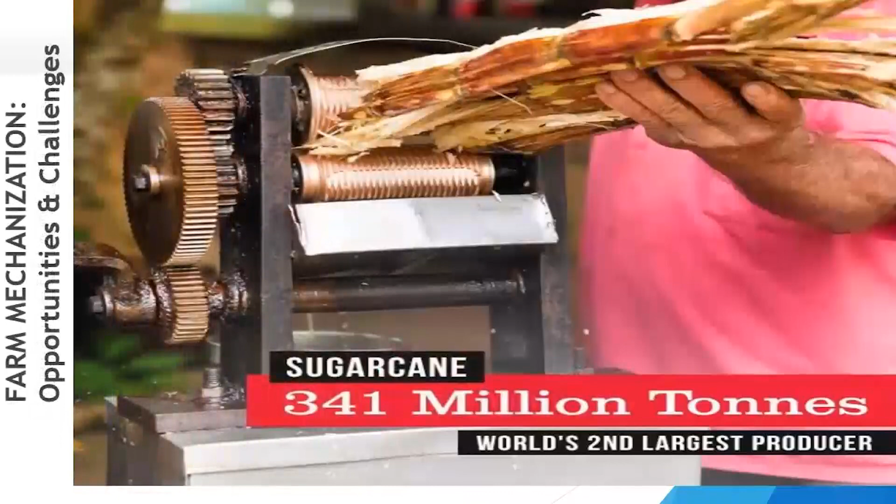Which is possible here is only farm mechanization. You can see sugarcane second largest, flowers again second largest in horticulture crops, and banana again the largest producer.

So the need for agriculture mechanization is a very important factor, and it also plays a vital role in optimizing the use of land, water, energy resources, manpower, and other inputs like seed, fertilizers, and pesticides.

We all know agriculture mechanization as well as farm mechanization. Agriculture mechanization is nothing but mechanization from seed to seed. It's a combination of plowing, seeding, application of fertilizers, harvesting, threshing, value-added products, and packing - that's the end. So that is seed to seed, complete mechanization, said to be agriculture mechanization.

Mechanization is very compulsory nowadays and in the coming future also. It also helps in the productivity of available cultivable area and makes agriculture a more profitable and attractive profession for rural youth. Nowadays many software people or high profession people are coming down to agriculture to do it with more mechanized methods, with greenhouses, polyhouses, etc., to get more profit.

It will also be useful for rural youths by having small CHCs - they can have mechanic shops, repair shops for making repairs of machinery, because the population of machinery is being increased day by day because of mechanization.

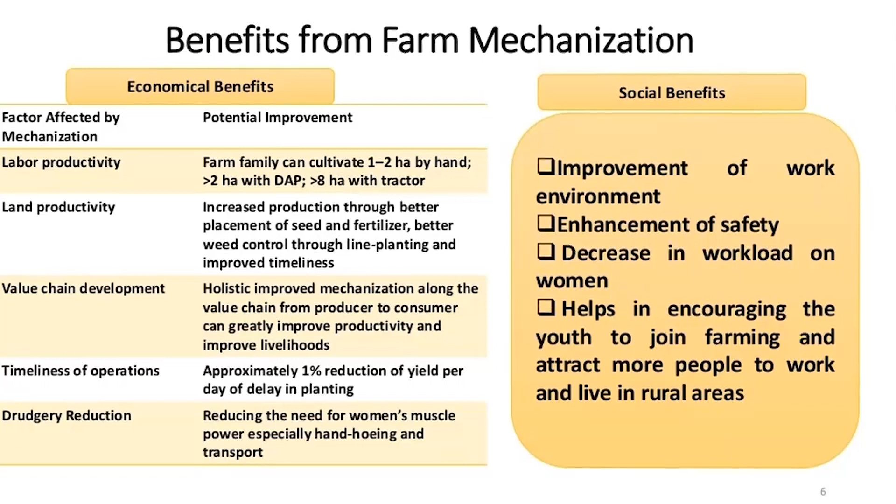If there are benefits, there will also be disadvantages of farm mechanization. That's why in India, we are still not 70 or 80% mechanized. We are always lagging behind at 30 to 40 or 40 to 50% mechanization. So there are some disadvantages of farm mechanization here.

One is that India is a very populated country, and the fragmentation of land is also a major disadvantage for farm mechanization, where huge machinery cannot be adopted in such small cultivable areas. Also other factors like different soil conditions and different environmental conditions matter.

Apart from that, on the machinery side, the cost of the machine is also very high, because raw materials are being imported, which escalates the cost highly. High depreciation and maintenance costs, and spare parts costs are too high. So maintenance and depreciation are also a disadvantage of farm mechanization.

The third issue is inadequate technical knowledge. A major issue in India is insufficient knowledge about machinery. Everybody thinks farm machinery just means a tractor, but it's not like that. Farm machinery is a combination of everything, from small tools to large machinery as well as smaller machineries. There are very few skilled people with the knowledge to operate these types of machinery, whether imported machinery or tractors.

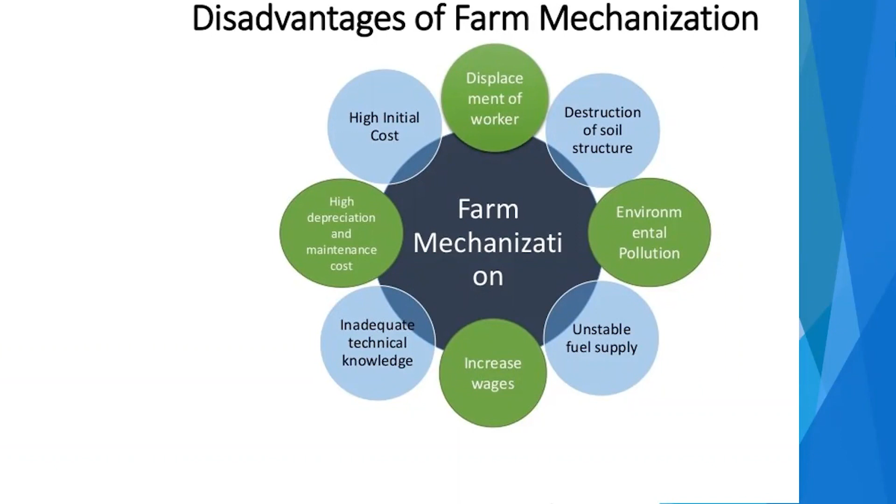So you can see the current status of farm mechanization in India. As we all know, the agriculture allied sector contributes approximately 14% to India's GDP. In future this may get increased. The use of proper equipment can increase farm productivity by 30%.

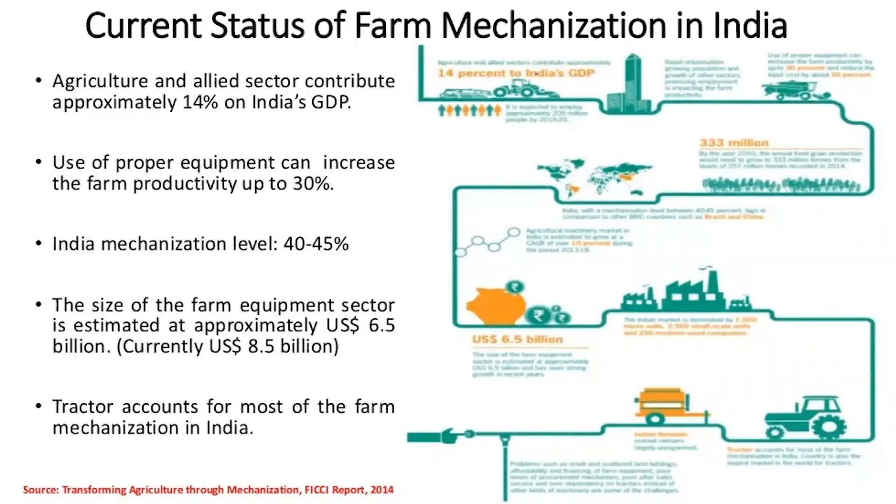So these are the extent of mechanization at various levels of farming, and these can also get increased. At present we can see soil work and seedbed preparation at 40%. This also can be achieved further in the future.

100% can be achieved. Nowadays this data is around 2014 data. At present we have achieved soil work and seed bed preparation mechanization of 60%. It has happened when there is a bigger area, it can be easily achieved. When it is a smaller area, then it has difficulty, so we have to go with smaller equipment to do these types of operations.

Irrigation also we are achieving around 37%, and latest we go for 43% being practiced now. Plant protection is also being increased, now 34%, nowadays it goes up to 40 or 45% being increased.

For seed and planting, earlier days people used to go broadcasting, using different types of seed drills. Nowadays people don't want to waste the seeds, so they went for precision seed drills and precision pneumatic seed drills, in order to place the seeds in exact spacing and get the yield with reduced seed sowing.

Finally, harvesting and threshing operations for most major crops, the major machinery has also arrived and is commercially available, around 60 to 70%. The same ratio is also existing now, being available at present.

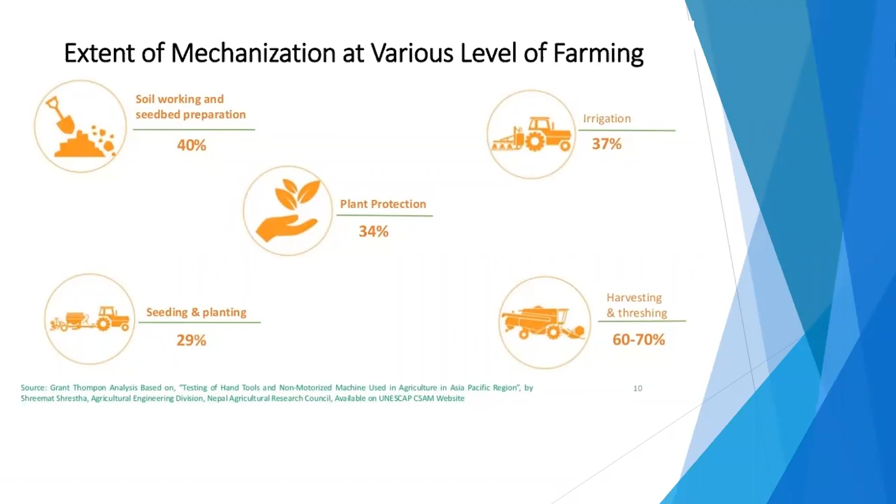So these are the major farm machineries used in India. We can see tractor is one of the major farm machinery, with 6 lakh units in the market. That is the biggest sale in market, worth 34,200 crores, because many tractor companies have been manufacturing in India to sell tractors, but it is not sufficient for India.

There are around 10,000 hectares per one tractor using it, that is from survey and statistical reports. So we still need improvement, to go with almost 1 crore tractors to have complete mechanization.

Power tiller's market size is very small compared to tractors, but now it has increased more. Nowadays the power tiller and medium tractors, that is mini tractors, have also come into the market. That market is also in more demand, for small land holdings for plowing and other operations.

You can also see threshers, rotavators, rice transplanters, self-propelled reapers, zero-till seed drills, multi-crop planters, laser land levelers and weeders. Nowadays self-propelled equipment is coming into the market.

What we need here is only the market. In the future stage, a lot of self-propelled machines will arrive in the market, to be used by small and marginal farmers of Tamil Nadu as well as in India. More demand will be for mechanization, only for mini tractors in the HP range of around 15 to 20 HP, which will come very soon.

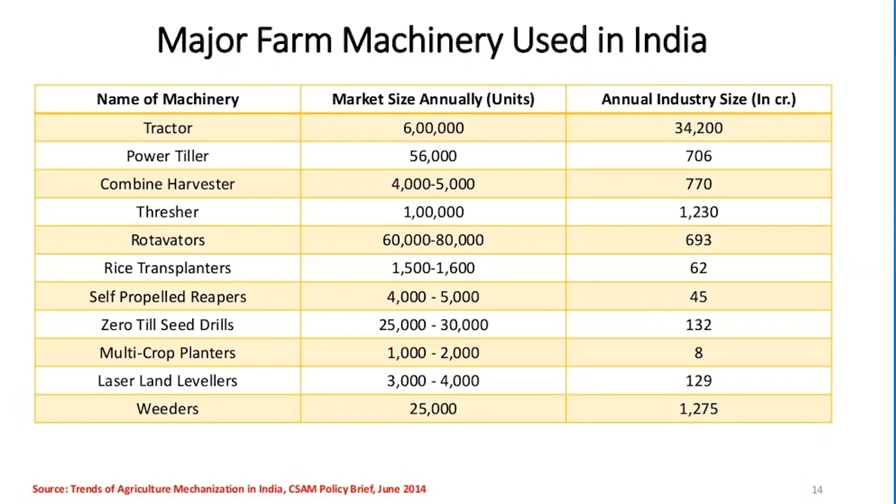So what are the opportunities in farm mechanization in India? The green color indicates what's available. For seed bed preparation, as I said earlier, nowadays we are saturated at 60 to 70%, done with the help of complete mechanization. All types of machinery and implements are available, the tractor is available, and it's completely saturated.

Still 30%, in some places with very small area as well as hilly areas, it is slightly difficult to do that type of operation. For that, what we need is demonstration to farmers to have larger use of machineries for seed bed preparation. Nowadays no bullocks are being used for seed bed preparation, everything is completely mechanized.

Second, for sowing, planting, transplanting and fertilizer application, manual methods are always available in some part, and animal-drawn methods are also available in some part of the area. In tractors, the major part is used for herbicide and fertilizer application, as well as sowing, planting, and everything is done at present with the help of tractors, power tillers, and self-propelled equipment as well.

You can see in hilly areas they are still using conventional tools. Where we go for precision farming machines, we still have to do more work to implement precision farming in the hilly areas.

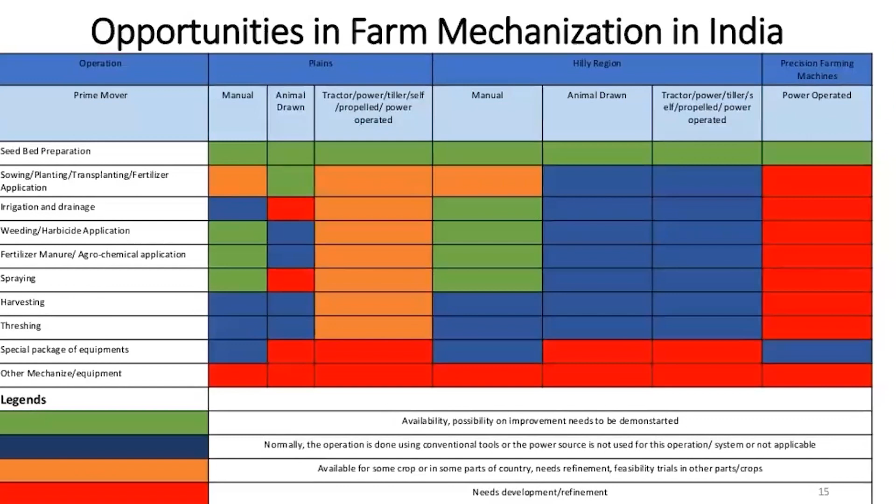So that's why I'm saying there are more opportunities related to farm mechanization in the coming future. This covers the opportunities in farm mechanization.

Now, what are the growth drivers, and how can this be improved? One way is contract farming. As I said earlier, the main disadvantage of farm mechanization is that the initial cost is very high—that's the biggest problem in Tamil Nadu as well as in India.

So we can go for contract farming, by gathering a group of people to share contract farming arrangements, so that the cost is shared among all the persons involved.

Low penetration of farm equipment is also an issue, but in future penetration will be higher. This means the percentage of tractor and machinery usage will increase, giving us higher penetration of farm equipment.

Credit availability is also important. Nowadays everything is possible—banks are giving more loans, and the government has more schemes to purchase equipment and farm machinery, so operations can be done effectively and on time.

So how can this be taken forward? As I said earlier, the government has many schemes, like CHC, the Custom Hiring Center scheme, which is now widely available. In Tamil Nadu and all over India, there are thousands of custom hiring centers available through the SMAM schemes.

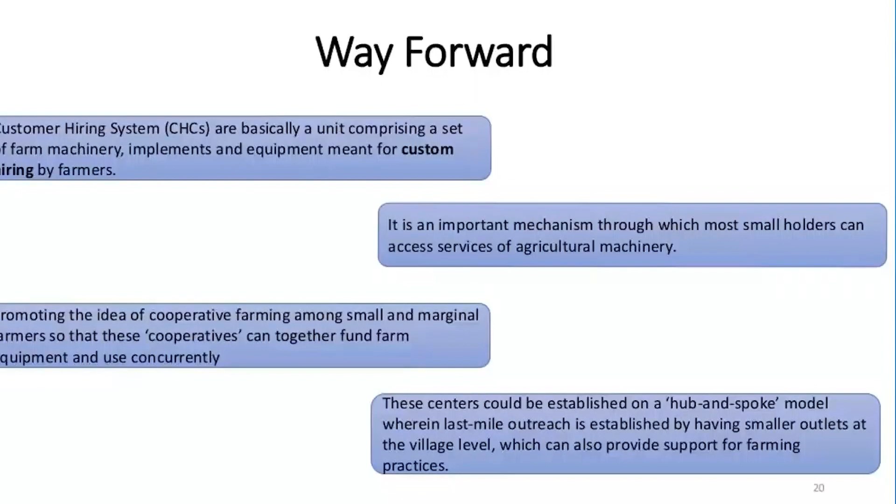As I said, in coming stages these applications are widely available, but currently with very limited availability because of too much cost.

One is called precision agriculture, which is controlling the rates of fertilizers, seeds, and everything, automatically or by human, so as not to waste more, decrease the cost, and place the seeds or fertilizer where it is required. The focus is on controlling how seeds, fertilizers and agrochemicals are applied to the soil and how the harvesting process is executed.

This focuses on several impacts such as technology, digitalization, and impact on society, skills, environment and productivity. Precision agriculture helps us place inputs exactly at the requirement so environmental benefits increase. For example, sprayers can correctly spray liquid on the plant with the help of this precision application, which we'll see in later slides.

This is possible with a wide range of technologies: geo-referencing, remote sensing, global navigation satellite systems, data storage, advisory systems, and autonomous navigation have been widely used in development of precision farming. Pneumatics are also being used for precision farming.

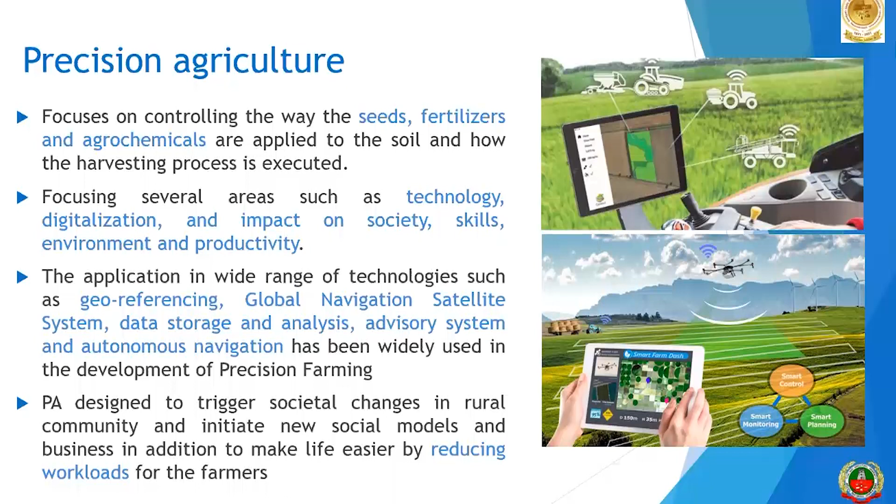Precision farming is designed to trigger societal changes in rural communities and initiate new social models and business, in addition to making life easier by reducing the workloads of farmers. We can easily reduce workloads and increase economical and social benefits with the help of precision agriculture.

This is all possible because of automation, since labor scarcity is high, and we can program machines to do the work at any time with precise applications. The term automated agriculture relates to any equipment or machine designed to remove manual intervention in agriculture, to completely eliminate manual operations, done with the help of robots, artificial intelligence, and so on, by writing algorithms and programs.

This will also be very possible in the coming future. Commercially it's already available in foreign countries, but within 1 or 2 years it may also be adopted in our Indian agriculture.

The focus is on minimizing deadly, risky, and long working conditions experienced by farmers, mainly sprayers. We all know that in Maharashtra an incident happened where almost 10 farmers died because of inhaling spraying chemicals. In such places we can go with automation so that no human touch is there with the chemicals, the work still gets done, and no human damage or drudgery is involved when we go for automation.

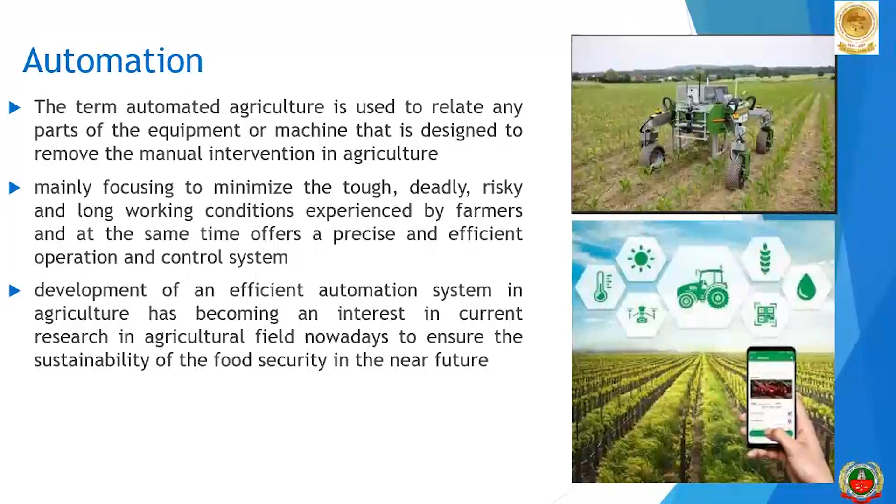There are some commercially existing machines already available at Tamil Nadu Agriculture University as well as in the market, which I'm going to show you now.

One is called laser leveling. We all know this technology arrived about 15 years ago. It completely works on automation, where we have transmitters and receivers, and automatically the leveling blade can be raised and lowered so that leveling is very uniform and the land is in a leveled condition.

Whenever we want to do agriculture mechanization, two things are very important: the land should be in level condition, and the crop spacing should be in row spacing. When these two conditions are satisfied, mechanization becomes much easier for other operations like weeding, spraying, and harvesting.

Leveling is one of the important operations so that we can maintain water level, so no additional water or water wastage is required when we do this leveling operation. For this we have very good machinery, all tractor-operated. Its field capacity is around 2 hectares per day, and it costs around 3.5 lakhs for the laser leveler, not the tractor.

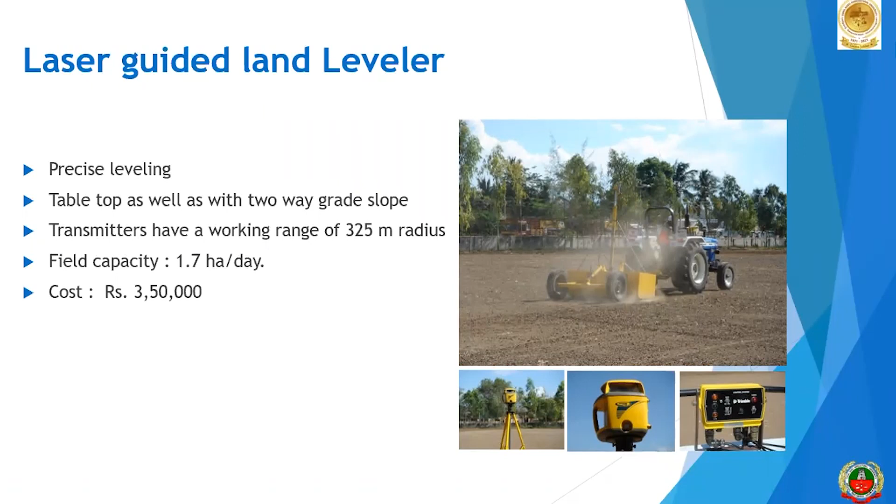This is another type of machinery called the wetland laser leveler. It was developed at TNAU, and we have commercialized this machine with Farm Equipments India Private Limited. This is completely automated. We never need to do operations like raising the hydraulics or the position lever manually. It automatically receives the signal and moves up and down, so the field level is uniformly maintained.

So for the SRI system, when you use this type of leveler, we can maintain a uniform level, so the water requirement is also much less. When you use this type of leveling, it becomes easy to do transplanting here. So we can go with machine transplanting, and when planting in rows, we can also do weeding easily with this type of leveler.

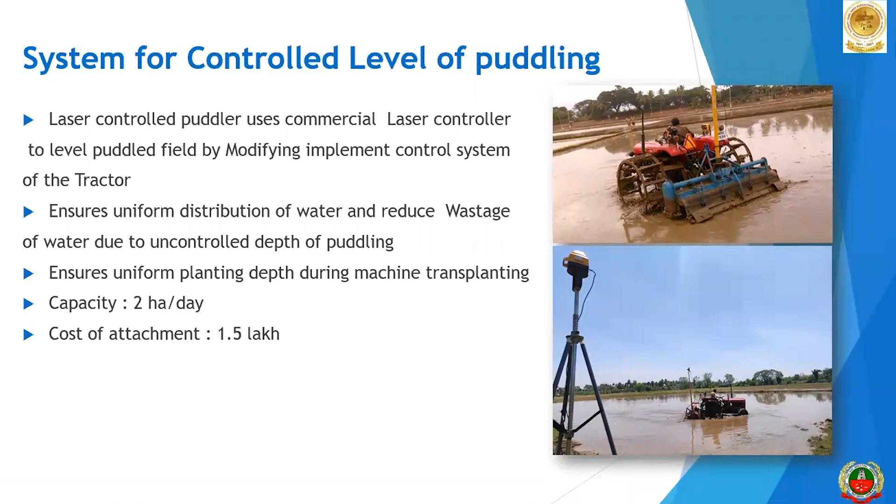This other one is a semi-automatic needle drive pro tray machine, exclusively for horticultural crops. Nowadays people get these mainly from the Coimbatore and Krishnagiri regions, where more horticultural crops are grown than local varieties. People are now going for hybrid varieties, which are very costly, around 50,000 to 60,000 rupees per kg, sometimes 20,000 rupees per kg. The seeds also look very small. So taking these seeds and manually putting them into the pro tray is a very difficult operation.

So what we did is develop a small machine so that with a single stroke, we can put the seeds into the tray. We can see this in the video.

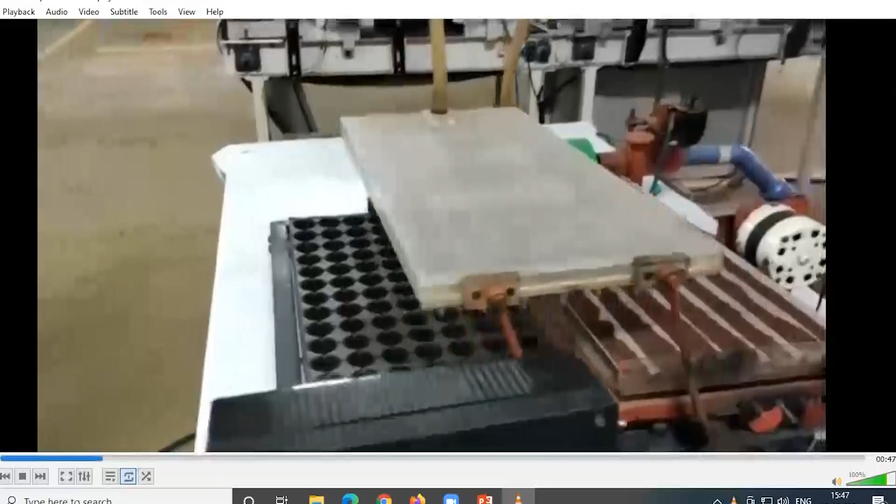With these machines, we can reduce labor cost. This is called a semi-automatic machine, not fully automatic. With a single stroke, we can place the seeds in a matter of 10 to 15 seconds using this type of machine. We have also now made this machine fully automatic. With it, we can sow around 300 pro trays per hour. This machine costs only around 50,000 rupees. It's very cheap, and anyone running a greenhouse selling seedlings can use this type of seed machine.

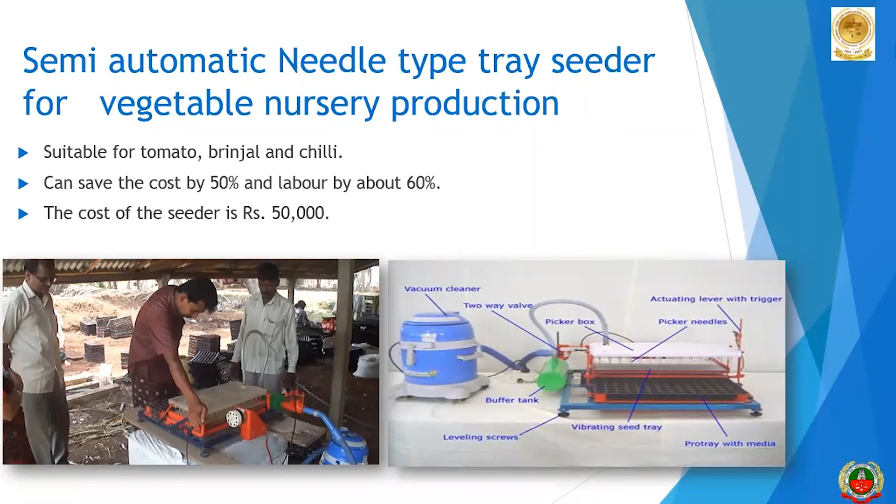Next comes the automated needle tray type pro tray machine. This is similar to the same machine, but the difference is that at a stretch, 7 seeds can be placed in the pro trays at once. It also has a conveyor system where the coir pith is flowed onto the tray on the conveyor. So in a single operation, we can complete all the operations and sow the seeds with the help of this automated needle pro tray seeder.

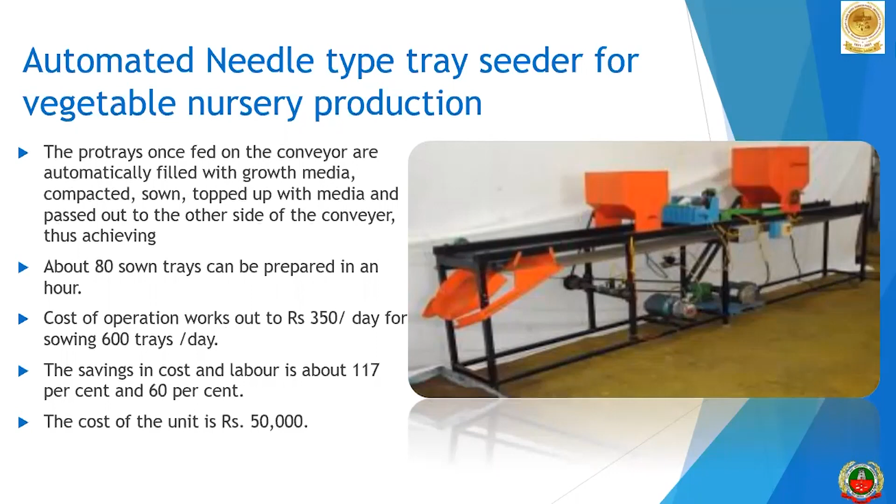This next one is a fully automated pro tray seeder for red gram. The same type of mechanism is used for this pro tray seeder as well. Because of time constraints, I couldn't show the videos, but we can see it now.

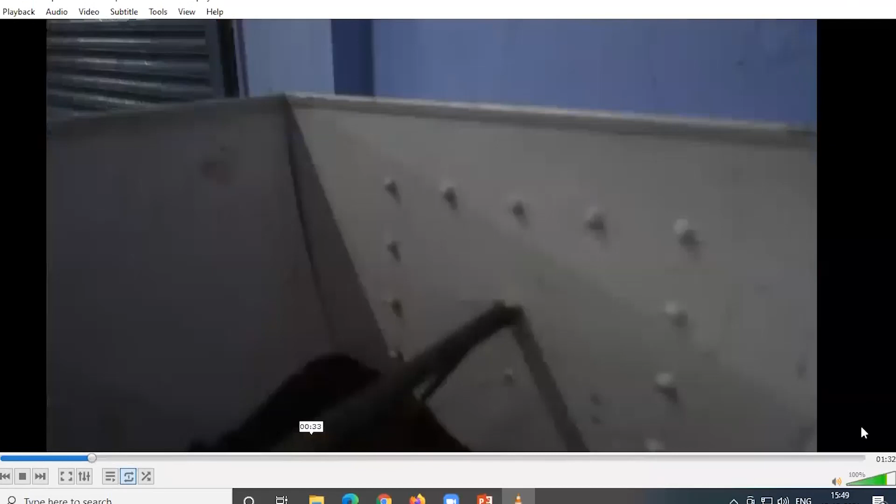You can see that a person just inserts the tray, and automatically everything happens: the coir pith and materials are filled, and compaction is done. After compaction, the seed is placed. It's then sent to the needle mechanism where the seeds are placed in each of the pro trays.

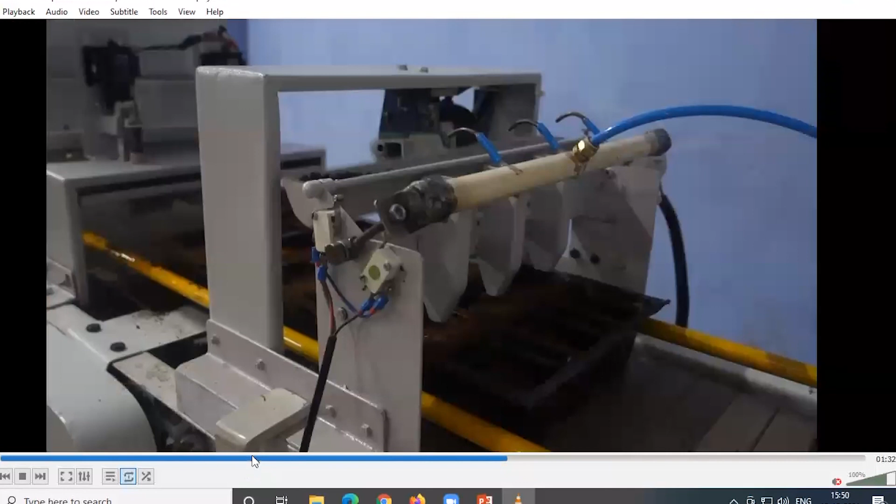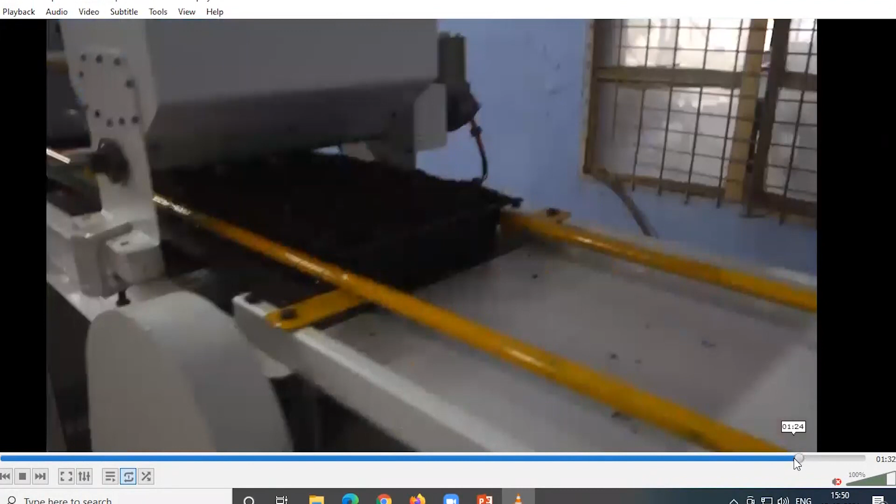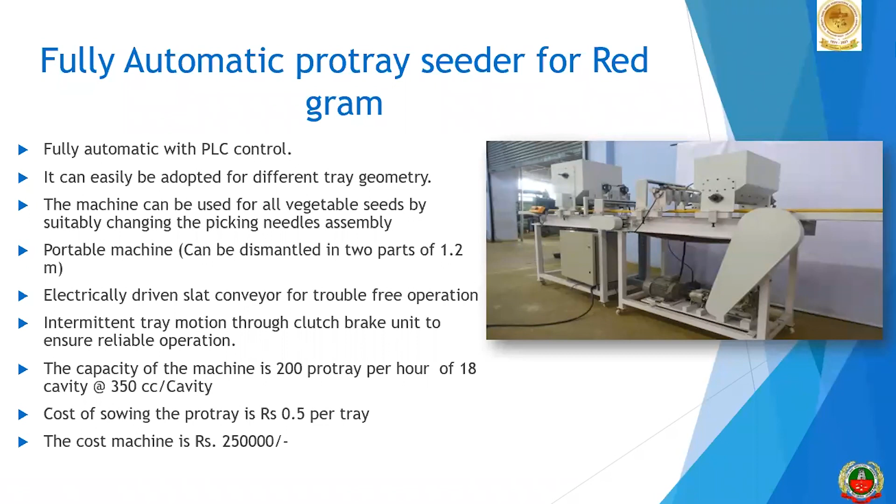After placing the seeds, it's again filled with coir pith, and then it can be easily removed. This is also a fully automatic machine, costing around 2,50,000 rupees. It's commercially available, and we developed this fully automatic pro tray seeder, including the compaction system, picking mechanism, and everything else.

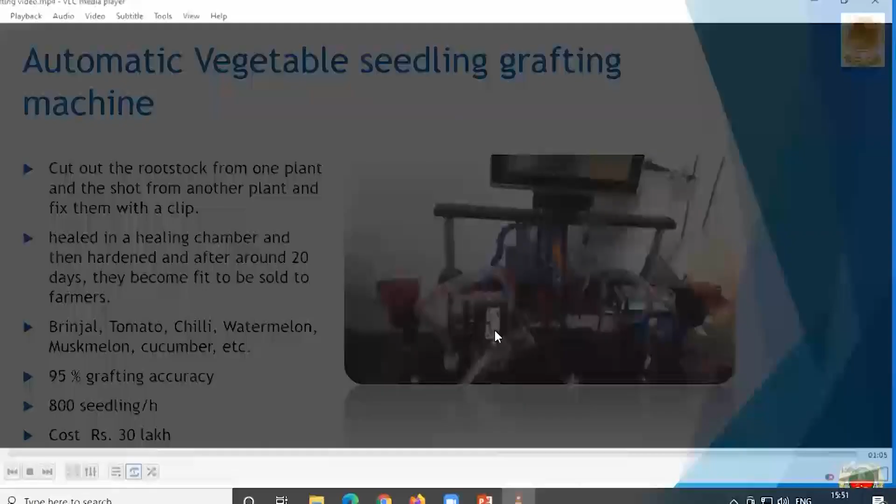Next comes the automatic vegetable seedling grafting machine. This one is imported, and in the future it will become very essential for farmers for grafting. You can see how the seedlings are grafted: the two sides are manually placed, and then it is automatically grafted. Everything is grafted automatically here.

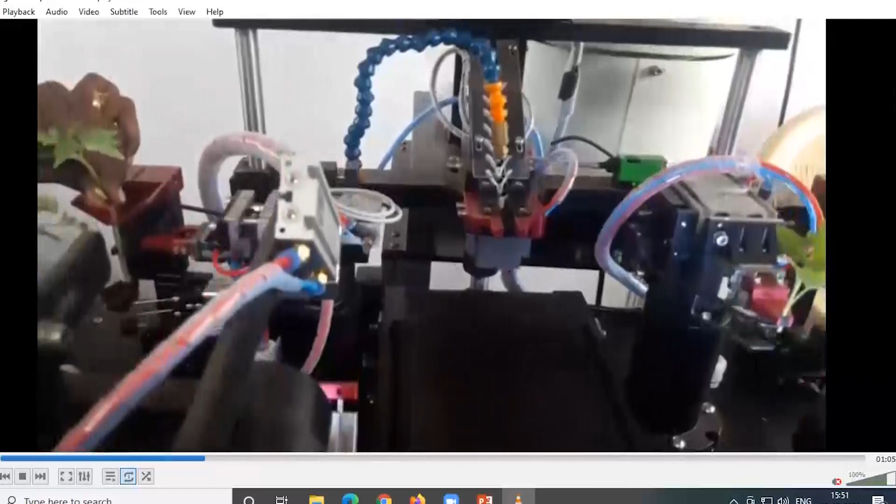So this is also available in Coimbatore, TNAU Coimbatore. But now cost is the problem for imported machines, because it costs around 30 lakhs. But in future, the cost may be reduced when the demand increases.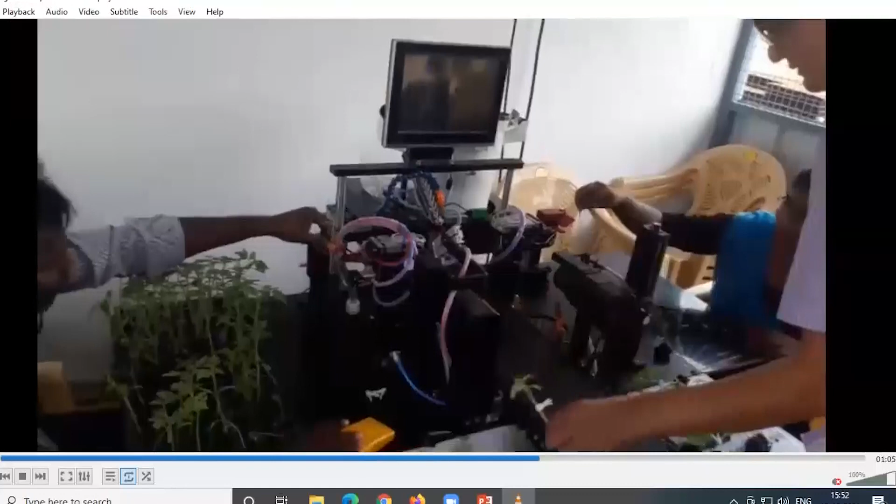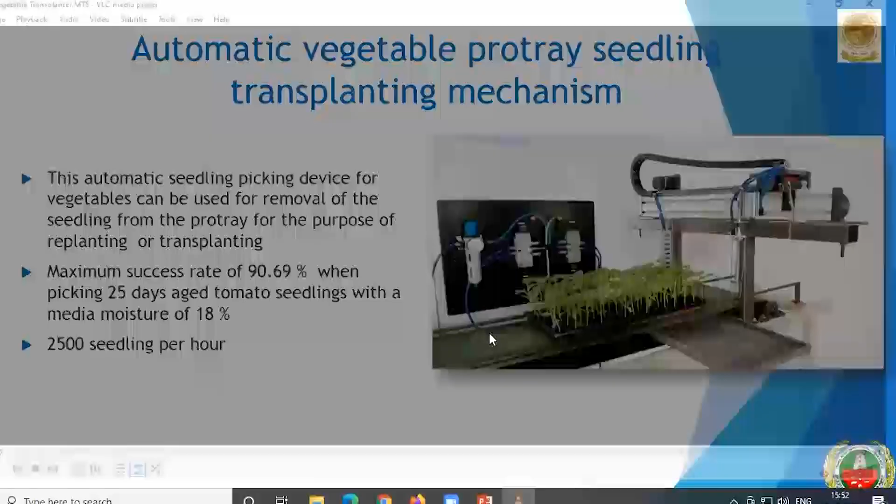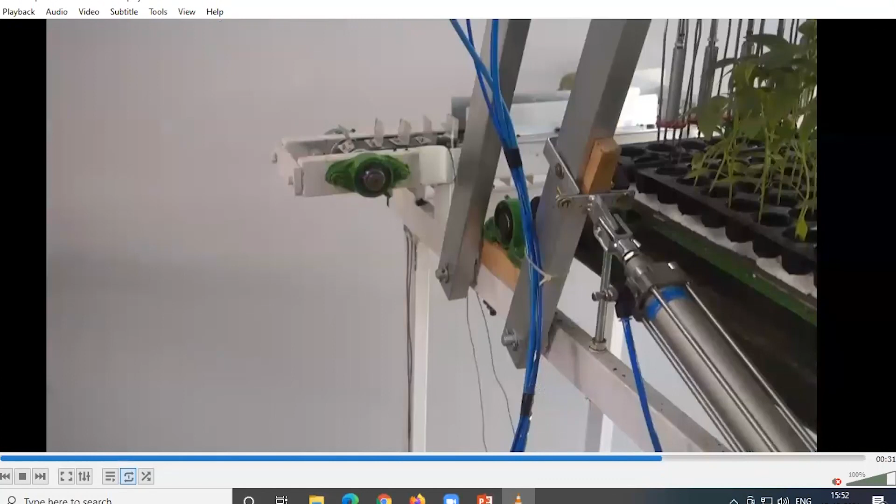Next is the automatic vegetable pro-tray transplanting mechanism. This is another type of mechanism, using fingers for transplanting. Before, what we saw was placing the seeds in a pro tray. With the pro tray, people nowadays manually take the seeds and sow them by hand or with transplanter machines. This is a fully automatic machine, so with the help of this technology we can also go with planting methods.

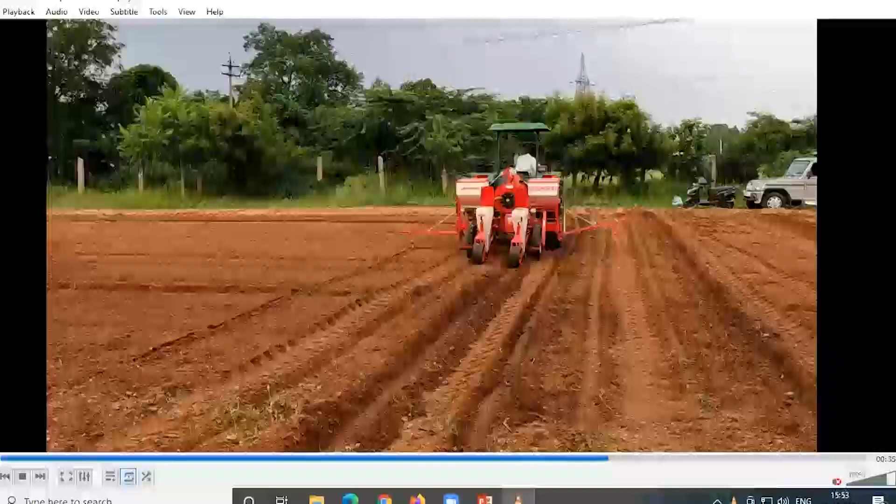And this is the precision vacuum planter. Nowadays this is also very popularized, and Gaspardo Italy brand machines are available. It is completely vacuum operated, and seeds of size 0.8 to 4.5 can be sown with the help of this machine. 0.8 size is like ragi, sesame, and other small seeds with a diameter of 0.8, and maximum 4.5 size seeds can be sown with this machine. This is called a precision planter.

Here the accurate spacing will be maintained. Plant to plant spacing can be altered from 8 centimeters to a maximum of 25 centimeters. Row to row spacing can be maintained from a minimum of 30 centimeters to a maximum of 45 to 60 centimeters.

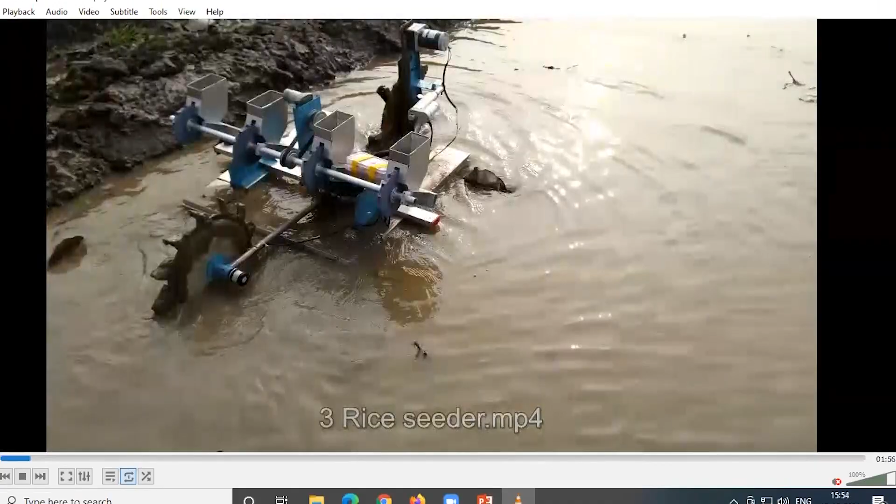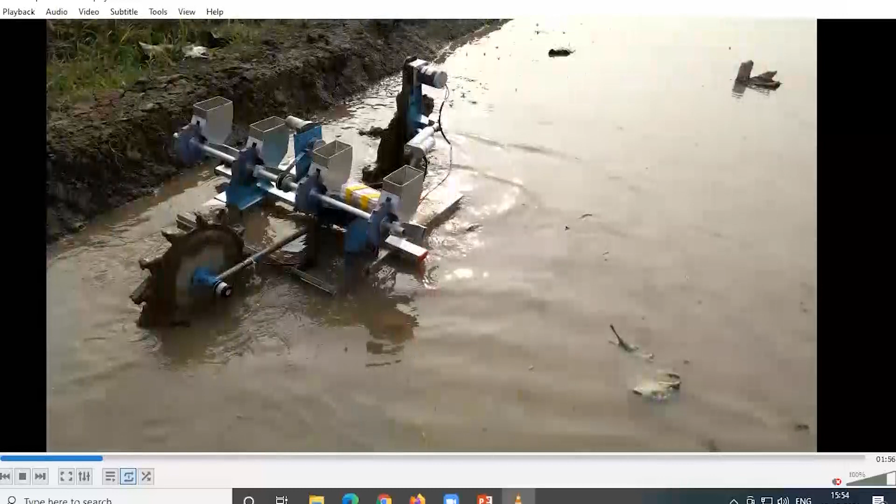And this is called a remote control pelletized rice seeder. This is also developed under TNAU. It is still under development, but there are more opportunities in future because wetland itself is a huge risk. Walking in wetland is a very tedious job. So this automatic machine pelletizes the paddy seeds and then drops them in the paddy field.

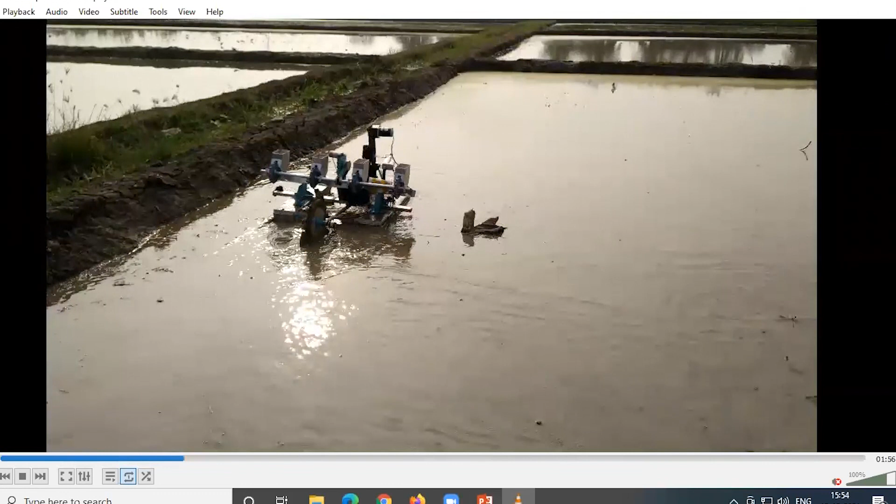This is fully remote control operated. At the backside, we can see a disc with encoders. Whatever power the drive wheel gives is monitored without any slips here, so that even spacing will be maintained. Equal spacing, row spacing as well as plant spacing, will be equally maintained here. This is one of the new technologies developed by TNAU.

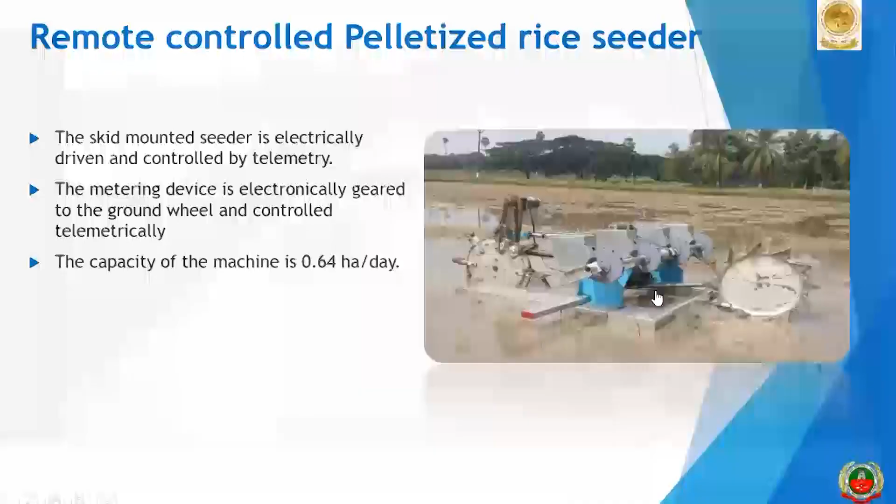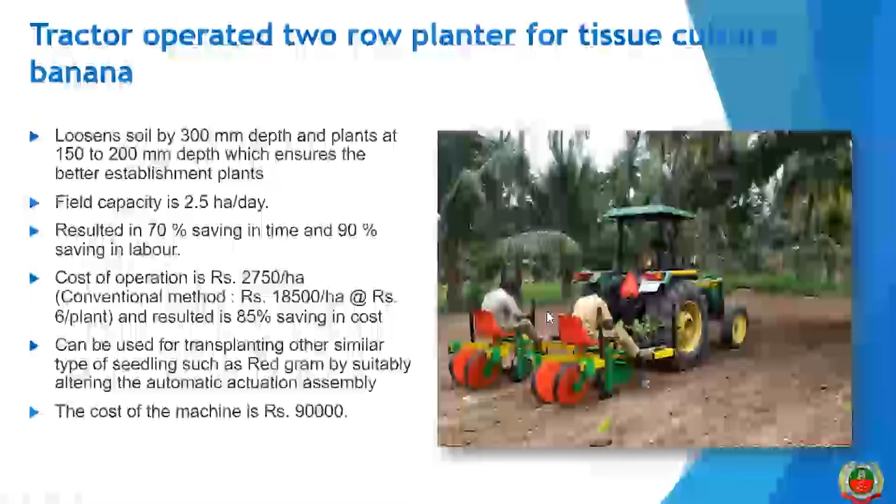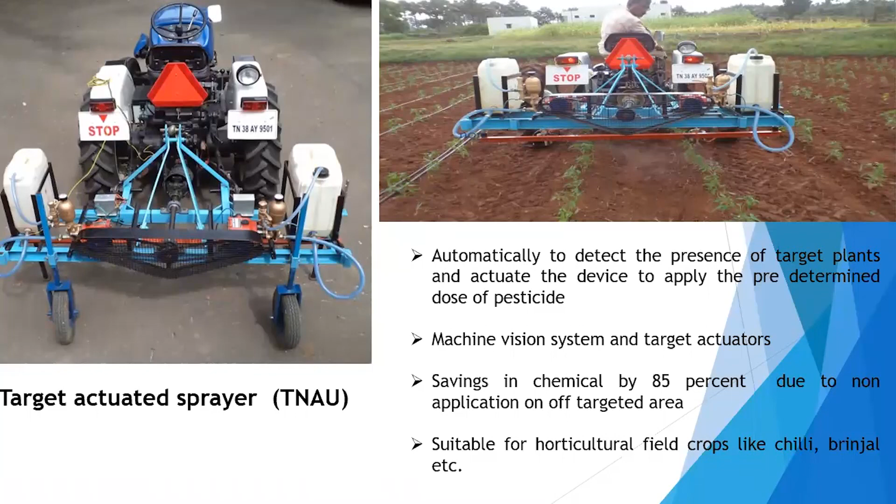This was developed in 2011 and 2012, and in future these will all play major roles in coming agriculture. And that is the drone application.

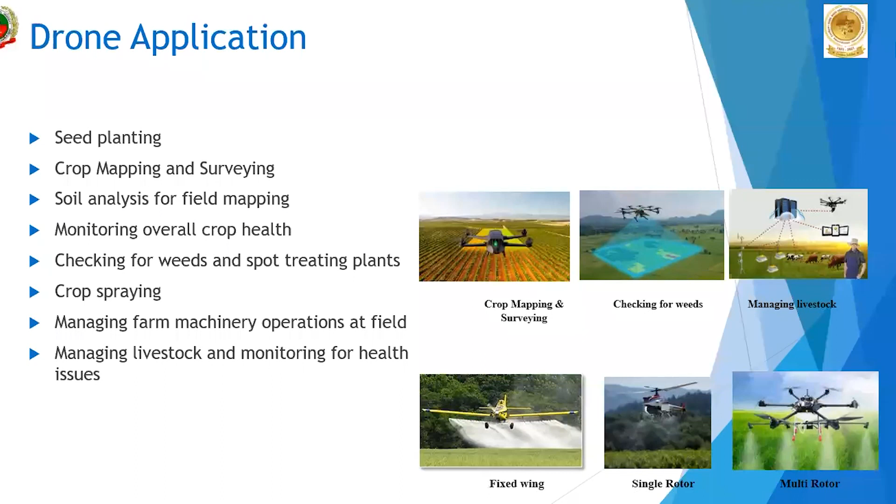In the earlier lecture, you would have seen about the drone application. Nowadays people are more commonly using these drones. All farmers are using the drone application, spraying within a matter of 15 to 20 minutes or 5 to 10 minutes for 1 acre with short time. So drone is also one of the proven technologies, but standardization of procedure is still being carried out by TNAU. Meanwhile, people are using it and it is commercially available.